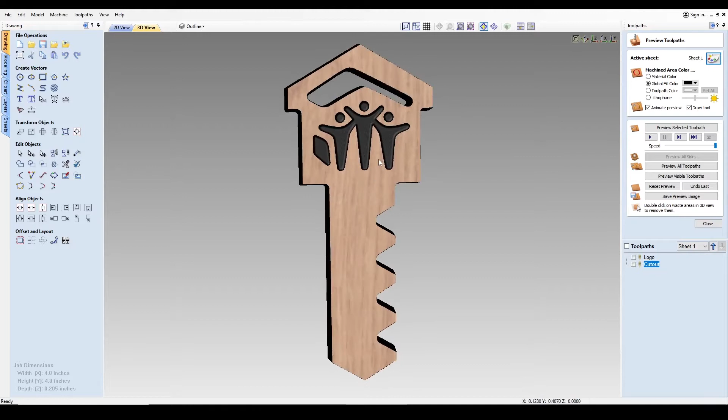The objective of this video clip is to show the creation of this Habitat key that you see here in this rendering. I'll be showing really only the steps necessary to form the key, not going into much other description about the various different features of this VCarve desktop software. I will show all the steps to create the outline and also show the importation of the vectors for this logo, since that part of the artwork already exists.

Now let's see what it would take to create a key from scratch. I'll park a rendering of that key that we're trying to make down in the lower left corner, but we'll use our Vectric VCarve desktop software and show all the tools necessary to make that key from scratch.

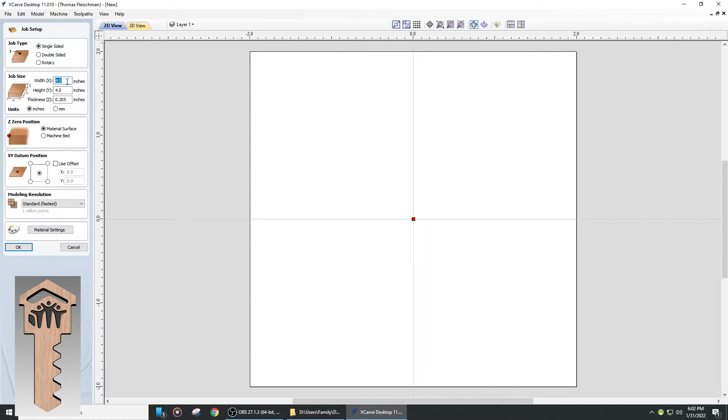So we'll create a new file. It'll be 4 inches by 4 inches by 0.205 inches thick. Say OK. That brings up a palette for us to work in here.

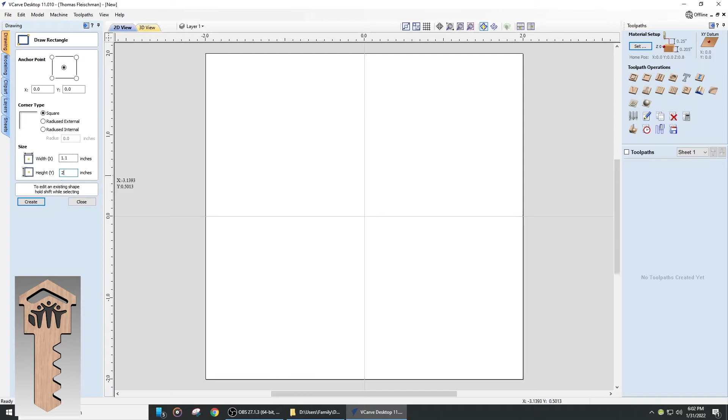First thing we'll do is draw a rectangle, which will be the outer periphery of the key. That key is going to be 1.1 inches wide and 2.5 inches tall.

Create that. Now we want to put the angles on the top and bottom, so we'll close our rectangle tool and go to our simple line tool. Start at the midpoint at the top, drag down, and you can see the angle changing, and it'll snap to even intervals like 30 degrees. If we move off of it and hit spacebar, it'll stop the line.

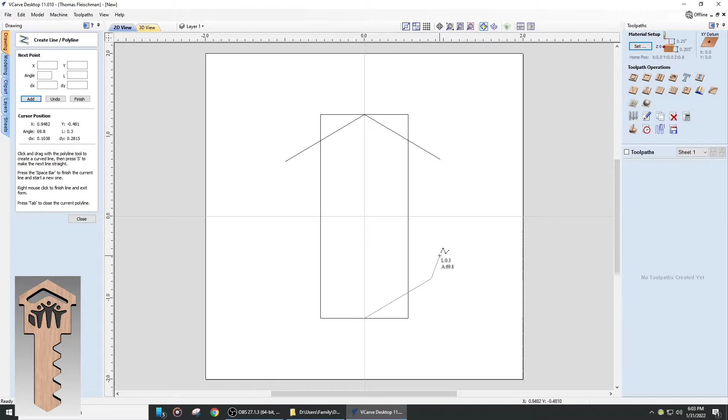We'll create another one: click on the midpoint, drag down, go to 30 degrees, click, hit spacebar. Do the same thing on the bottom: midpoint on the bottom, drag out to 30 degrees, click, move off, spacebar. Click on the middle, go to 30 degrees, click, move off, spacebar.

Now we're going to close our line tool and pick our interactive trim tool just to do some cleanup here. We'll remove these pieces on the end that we don't need anymore. So let's get rid of those. Now we have something a little bit closer to the outer boundary that we're looking for.

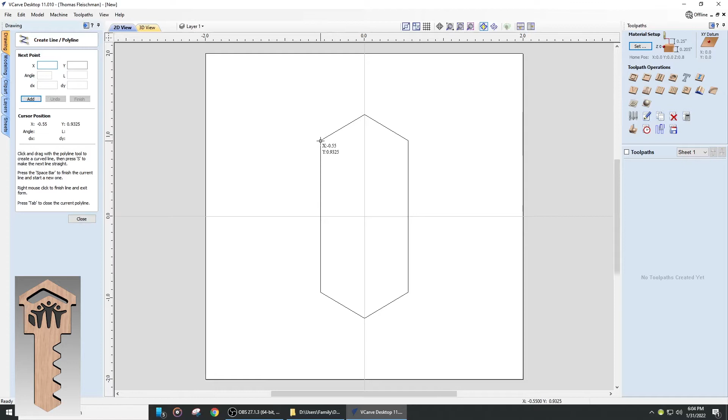Next, I'm going to create just a construction line, and you'll see what this is for in a second. So I'm going to click on this point here, drag out to the left, click off of it, and that's a height that I'm going to want to use here a little bit later.

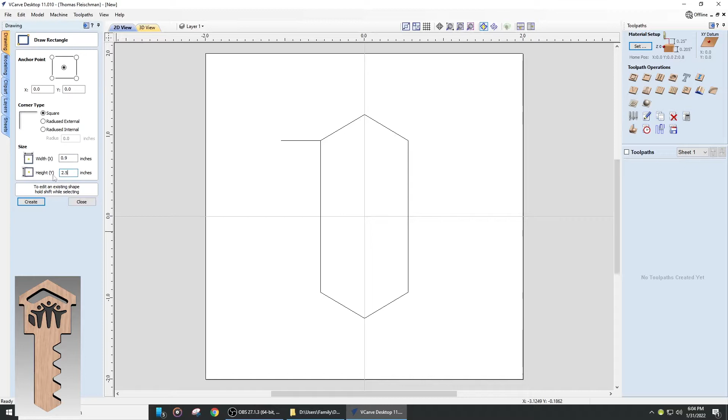So next, let's form the house-looking portion of the key, another rectangle, and its width is going to be 0.9, and the height, not sure yet, maybe 2.5 is not bad. We'll trim it as we need. So let's create that.

Yes, okay, that's taller than I wanted. Actually, I want this to be 0.55 tall. So close that, get rid of that one that I made by mistake.

Now I want this house portion to be up underneath of the roof. So by clicking on this rectangle and then holding the shift key and clicking on this line, I'm going to align the top of this rectangle to this line by choosing one of these alignment tools. And there it is. I still, however, want to create a bit of an eave to go on this house.

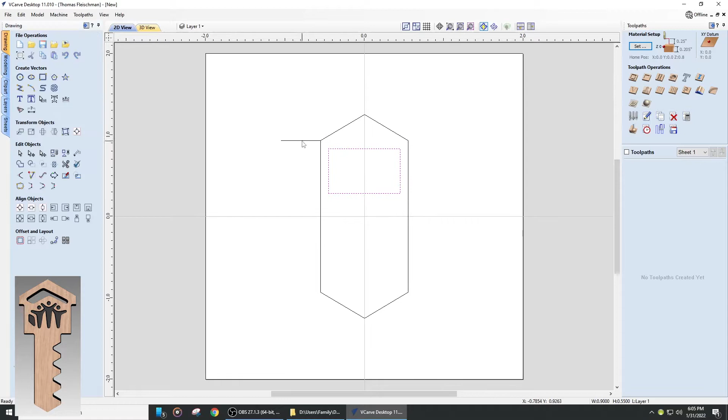So I'm going to move this rectangle down just a bit. I'll click on it, use the move tool, move object relative, in the Y direction minus 0.1 inches. Apply that and close it. I don't need this line anymore, so I'll delete it.

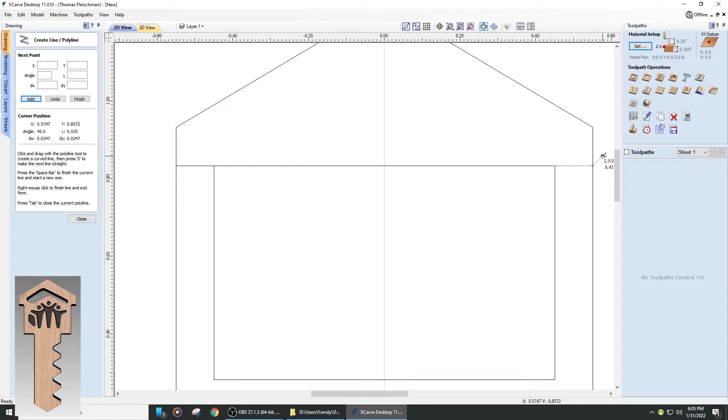I do want to extend this line over to the outside, so let's zoom in a bit there. We'll go to our line tool, click here, go to the outside, release, hit spacebar. Do the same on the other side: go to the outside, release, spacebar, close.

So I got a couple of extra pieces here that I don't need, like this top line. So go to my trim tool and trim that piece off. Actually, don't need—well, that'll delete too much. Let's not do that yet.

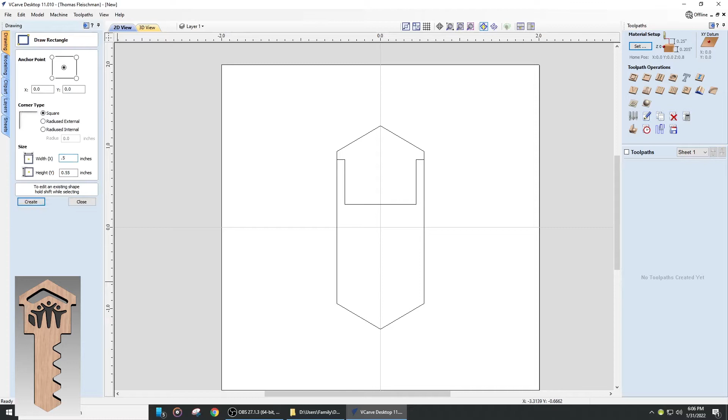Now the long key part that has the teeth in it will be another rectangle. Let's open up the rectangle tool. That one is going to be 0.5 inches wide, and the length I'm going to be trimming later. Let's make it 2.5 for now.

So create that. It has some extra pieces I don't want, so we'll go to the trim tool and trim this off. Now I believe I can trim these outside pieces off. There we go, and this piece here.

So now I have the outer boundary of the key that I want. I just need to put the teeth in on one side. So I'm going to zoom into this area down here, and I'm going to use this line as the base, or the bottom root, for the teeth.

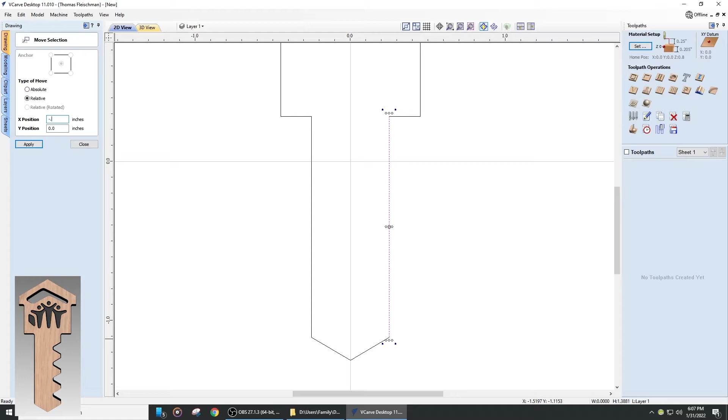In order to do that, when I click on it, I can see that it's connected to all the other lines as a vector. So I'm going to go in, hit the letter N for node editing, and cut this vector here by right-clicking, cut vector, right-click, cut vector, then hit N again to get out of node editing mode. I'll click on that vector, go back to the move tool, relative in the X direction, minus 0.15 inches. Apply, close.

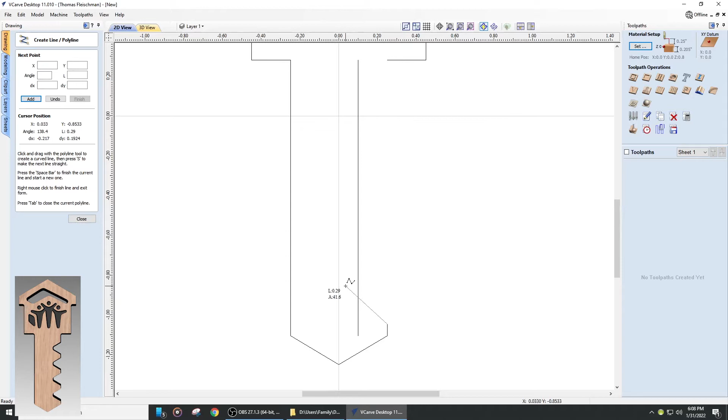Okay, so this is where I want the teeth to end up. So first I want to put a flat on the last tooth here. I'll go to the line tool, click on this point, come up until it reaches 0.06 inches, release, move off, hit the space bar. Then, still in the line tool, I'll click on this point, come over 30 degrees, move around 30, click off, space bar.

Okay, close that. This line I don't need anymore, I'm going to delete that. And I'm going to take advantage of some symmetry, making a tooth out of these two lines that I've already drawn. So I'll click on both of these lines and tell the software to connect them, so now I have one vector out of these two lines.

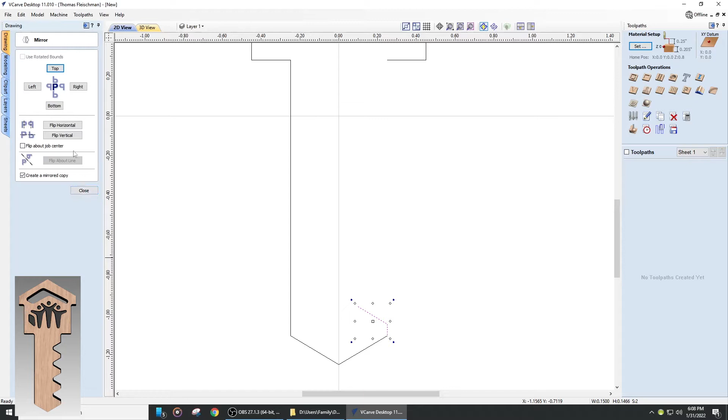Next, I'm going to take those two lines and mirror them with this mirror tool. I will flip horizontally and create a mirrored copy. So let's do that and close.

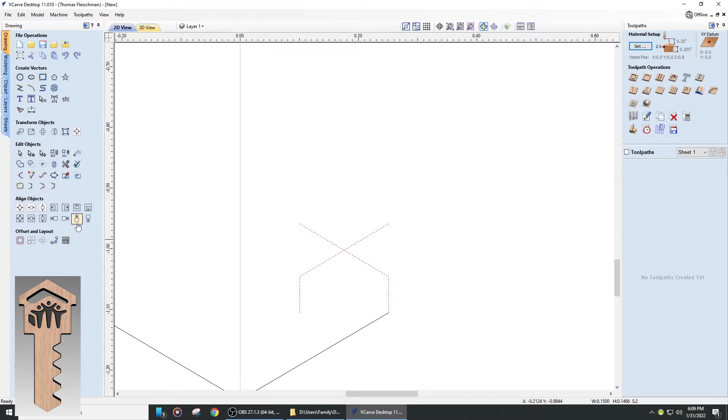You're going to see where this is going. So here's the second line I made, this purple one, and what I want to do is drop it onto the tip of this one. So I've got the first line selected, I'm going to hold the shift key, click on the second line, then use this alignment tool to drop that first line down onto the second one.

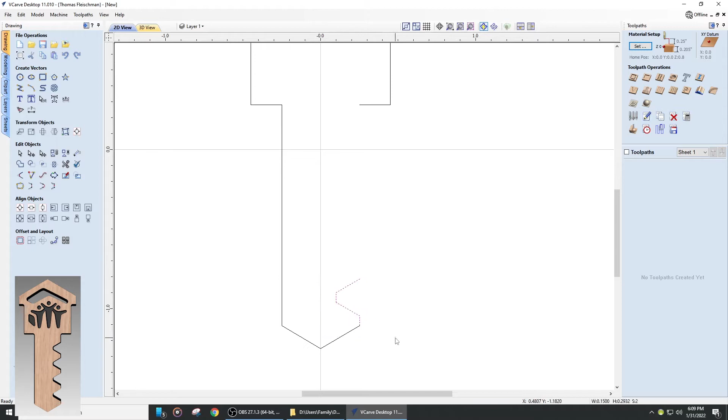So now I've made a full tooth on the end of this key. What I really need though is 4 more of these. Fortunately, I don't need to draw them all. I can take this set of vectors and use the array copy tool - I want 4 rows of keys and 1 column of keys, with no gap or offset between them. So let's just copy that. That took my 1 tooth and made 4 teeth out of it.

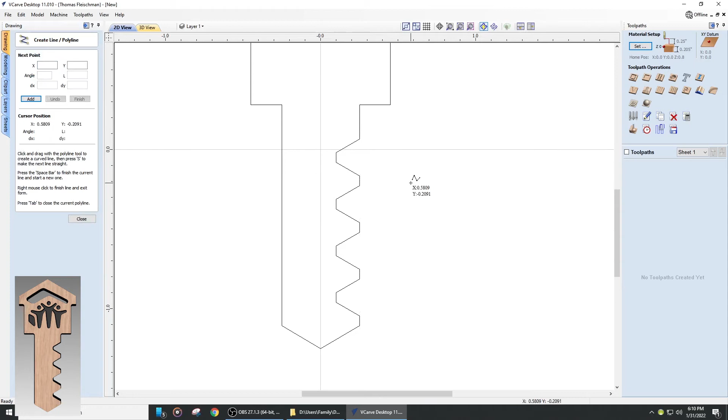Good deal. All right, next, just use our line tool and connect up to close the boundary. So now we've got the entire outline of the key that we wanted. Let's take a look here - I think we might have some open vectors, so I'm going to draw a bounding box around all of it.

Use this tool that says join open vectors. It'll tell me that none are closed right now - I have 10 parts that are open. So I will join those and make one complete vector for the outside boundary of the key.

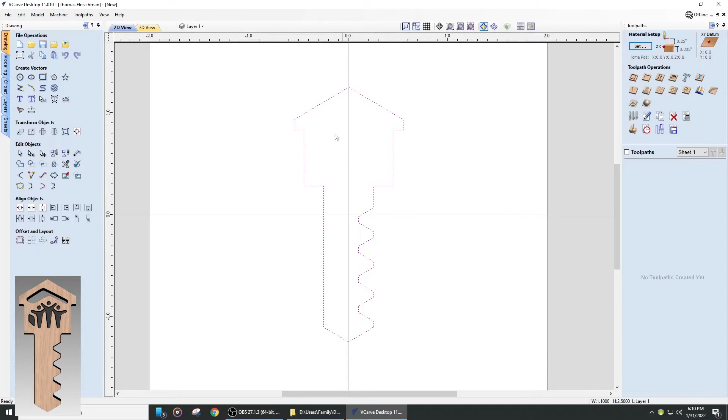Next, we want to bring in the vectors for the logo, the Habitat logo. To do that, I'll say File, Import Vectors, and I have an encapsulated PostScript file here, Habitat key logo. Double click on that one, and in comes the vectors for the logo. Click off of that, and that looks pretty good.

Now we've got our key and our logo, and all that remains is to go over to the Toolpaths and create the toolpaths for the router bits to follow to cut this out of our material.

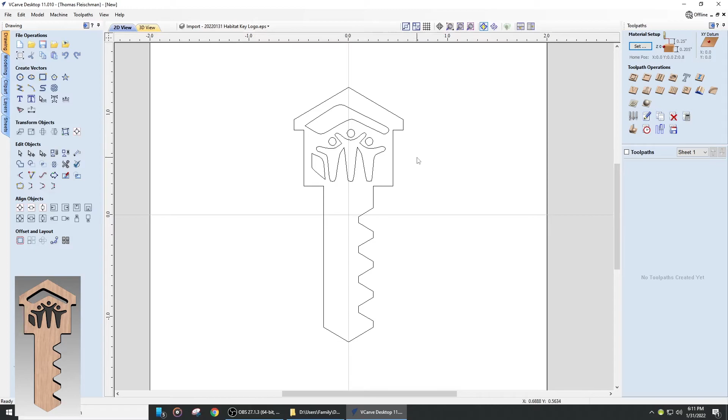What we're going to do is go over to the panel on the right and begin with our toolpath operations. So the first thing we're going to do is set our material and the movement of the router bit above the material. So let's see what we've got over here.

Since we'd already entered 0.205 for the thickness of our material, which we measured with calipers earlier, that's already set. This XY datum is telling us that we're working from the center of the job. The Z0 is on the surface of the material.

These last sections down here are going to tell us how the router bit is going to move around between passes when it does the job. So rapid Z gaps: this 0.25 inches is how far the router bit is going to fly above the surface of the material as it goes from one cut to another. And then the home position is like the very start and stop position, and it will be at 0,0, center of the material, and 0.8 inches above the material.

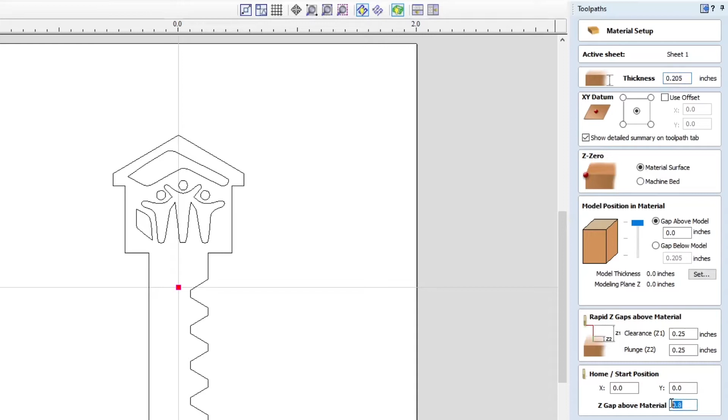Well, let's change it to 1 just to change something here. So okay, so there we go. So that's all set up.

The next thing that we need to do is create this logo as a little pocket inside of the key. So we're going to select that part of the artwork only, and we'll create a pocketed toolpath. So that's this second icon here.

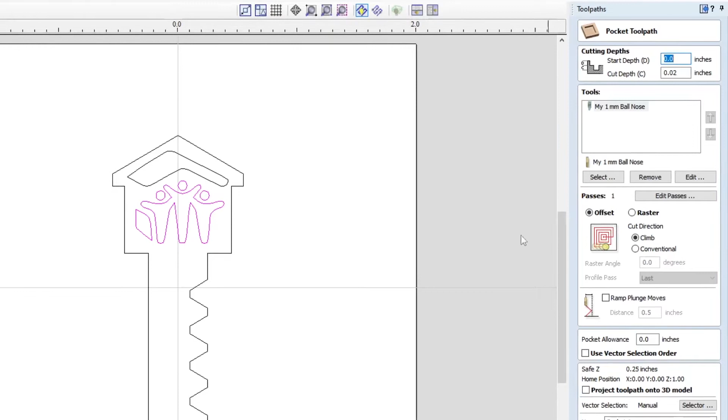Let's pocket. Start depth is 0, we want to start at the surface. We want to go 20 thousandths deep. We're going to use a 1mm ball nose spiral end mill, meaning it has a 1 millimeter rounded radius on the tip of this fairly sharp end mill. That's all good. It's going to offset—move around inside of here in an offset rather than a raster movement. We're going to leave these blank, and let's go ahead and at least name it.

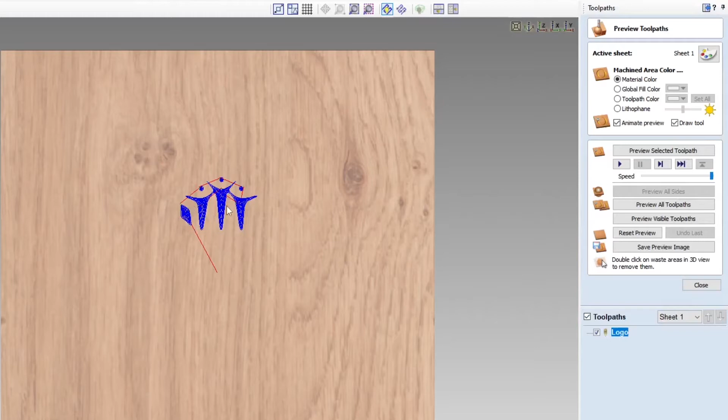So we'll call this logo, L-O-G-O, and calculate. And there it is. So what it's showing me now is the blue here is all of the vectors, or all of the passes that the router bit is going to make to form this pocketed logo. You can see them here—here's the heads, here's the bodies, and so forth.

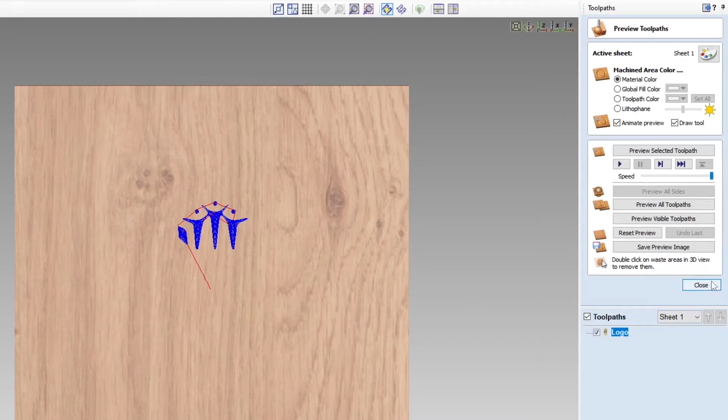So we'll render that here in a second. For now, that looks good, looks like what we want. So let's close that, we'll erase that, and go back to 2D. It automatically went to 3D for us.

So the next thing we want to do is cut out the outer periphery of the key, and we also want to cut this roof out with a hole all the way through, because this is going to be used to hold the key ring. So we're going to kind of double duty this roof object, not only as part of the art, but also functionally to hold the key ring.

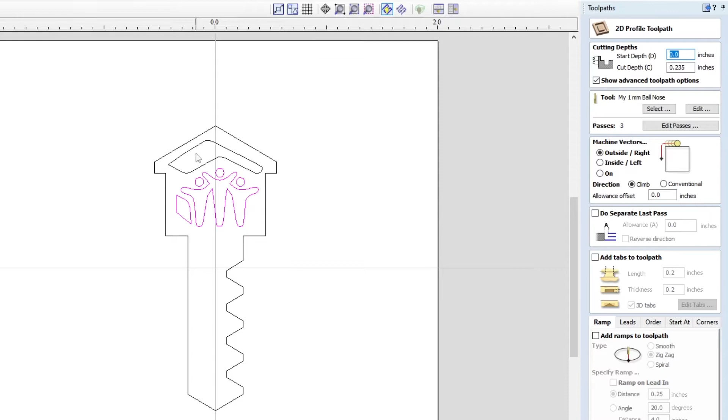So to do that, we'll go to a profile toolpath, and we're going to select the outer boundary and the roof vector. So we're going to go around it.

So the start depth is 0 again on the surface. We're going to cut all the way through the material plus an additional 20 thousandths. So it says 0.235—if you didn't remember the thickness of the material, you can put a Z in here, then plus 0.02 equals 225, excuse me, and that's how deep the router bit is going to go.

Now I'm going to use the 1mm ball nose again. We're going to go outside of the vectors so that we leave this full geometry here. It's telling me it's going to take 3 passes to do that. We'll talk about tabs later. We're not going to do ramps, but let's go ahead and name this one cutout.

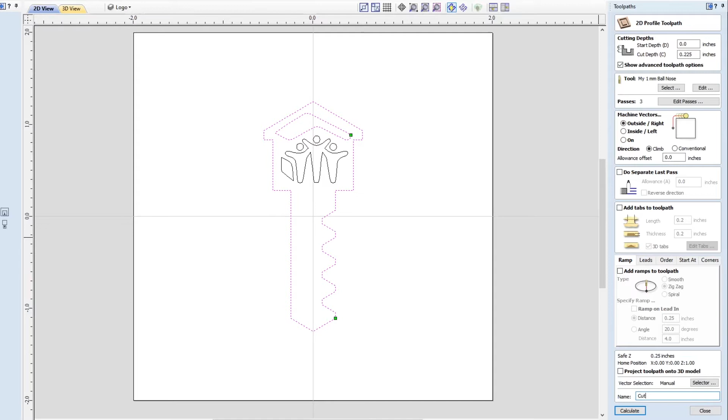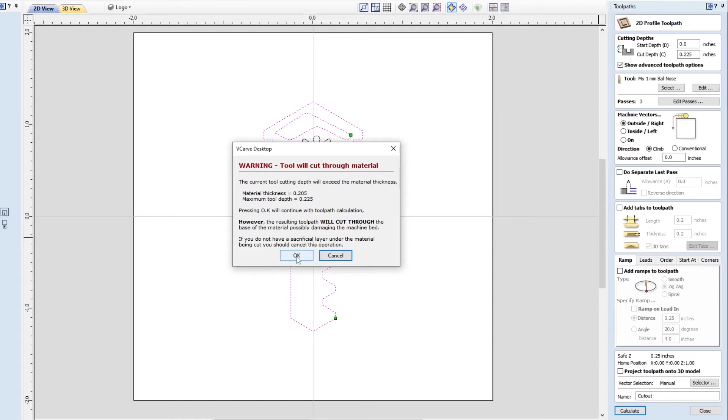Cutout, calculate. Now it gives a warning message: your material is 205, but you've told it to cut to 225. You're going to cut through the material, and if it's sitting on the base of the machine, it's going to cut into the base. So we'll put a spoil board in there so that's not an issue. We say, okay, we understand that's an issue.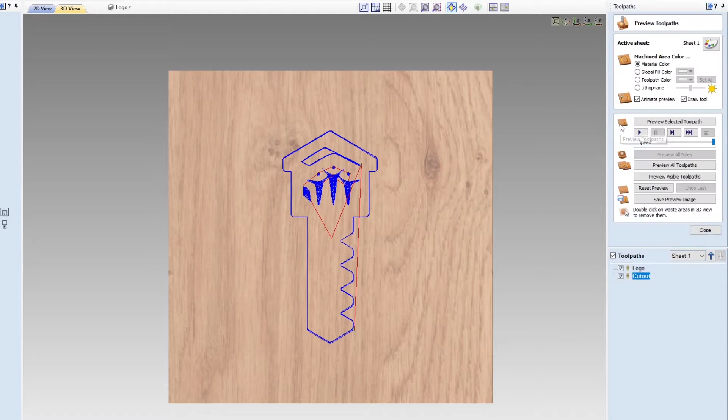Now it's showing all of our vectors. We've got the passes that do the logo, and then the cutout passes. While we're in this 3D view, we can go to Preview Toolpath. This icon is Preview the Toolpaths, and then let's say Preview all Toolpaths.

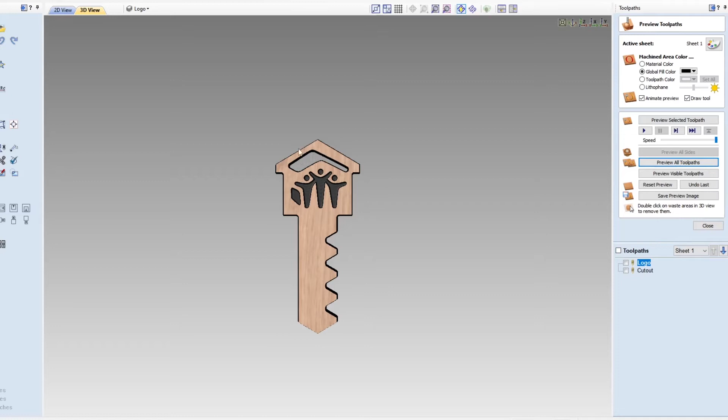It's showing the movement of the router bit, and it's cut into here, and also cut out around that. If I want the logo detail to show up better, I'll change this global fill color to black, and we see the bodies filled in with black. Also, if we double click on areas of the material that are completely cut out, it reveals just the key itself, and all the excess material is moved away.

One other thing I want to show is one of the issues could be - let's go back to 2D view - as we cut this out, we really don't want the key to start rattling around in the pocket that's created there. So one of the things we can do is go back to our cutout toolpath and add some tabs.

So we'll come to this, add tabs to the toolpath, edit them, and put a tab here and a tab here, one on either end, but on areas that are relatively flat, so they're easy to cut off with a chisel and then file down to leave a clean looking product.

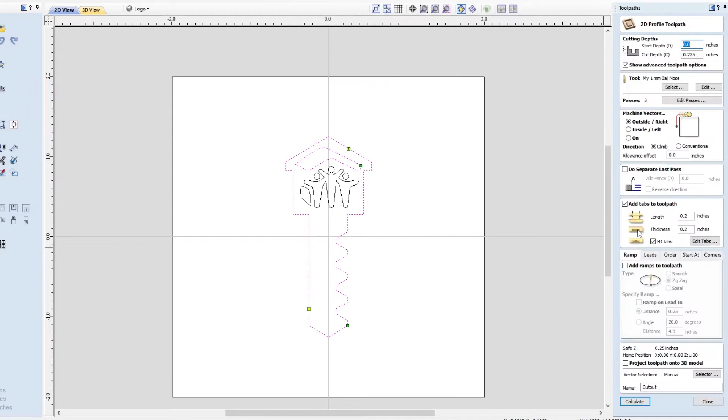Close that, calculate it again. It's going to cut through, that's okay. Let's reset the preview one more time. Preview all toolpaths. And there we go. I'm going to straighten this up just a hair.

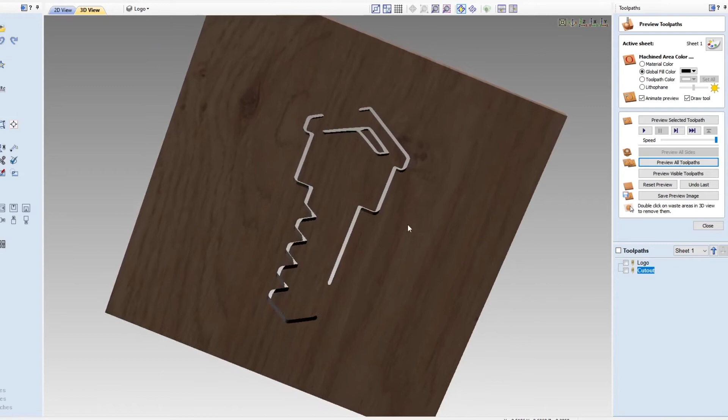Now, what you see is, on the back side, or on the front too if you look, you can see that it's still connected to the outside part of the material. This will keep the key from moving around inside of this pocket when it's completely cut out, and having the possibility of the router bit taking a chunk out of the finished key. So that's useful.

We've created the universal toolpaths at this point, but they need to be converted into a language that the controller for our particular machine will understand. So let's have a look again at the logo toolpaths, the folks in the center there, and then the cutout toolpaths. In order to save these, we'll use the Save Toolpath icon, which will bring up a screen as shown here in the upper right.

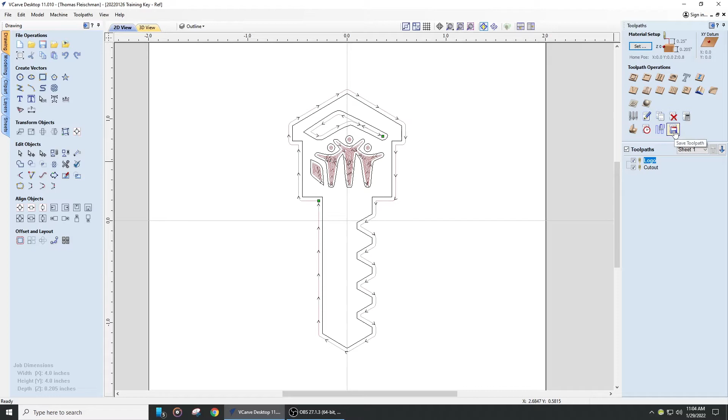We're going to select Visible Toolpaths to one file. What that means is, because we're cutting all of our toolpaths with the same router bit, both the logo and the cutout being cut with the 1mm ball nose bit, they can all be put into one file and be executed successively at the machine.

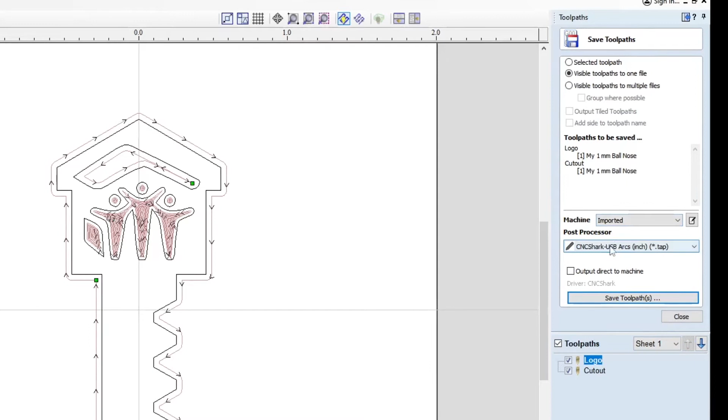It's important that we pick the correct post-processor. Again, these toolpaths need to be understood by our controller, so the CNC Shark USB ARCS inch star.tap, that is the post-processor that we want to use for the router on the Shark 2.

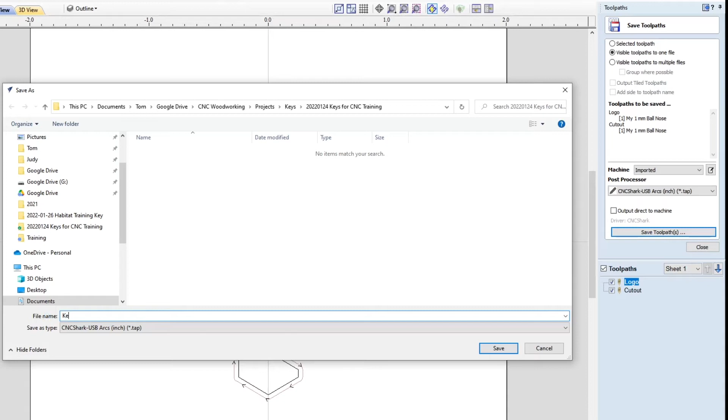We say Save Toolpath, and it will take the name of the first item in our toolpath, but let's make it descriptive of both. So let's just say key for training, and it'll give it the extension .tap, and we say save, and we're good to go. Clear those toolpaths, clear the screen, and we'll also copy that file over to a flash drive and then proceed to the actual CNC machine.

You can see we're now at the CNC machine. We've brought our toolpaths down on this flash drive, which we can insert into the left side of the pendant, which is connected to the control box. We'll go ahead and turn that control box on now.

When we do that, the pendant lights up and gives us a welcome screen. We'll say continue, and then acknowledge the warning that we're using a power tool. We brought along this drawing that gives us some dimensions and other information about the job we're going to run, and a picture of the key.

It helps us know where we're going to put our clamps, and just to verify which router bit we're using, and also which file we're going to be executing in this next phase.

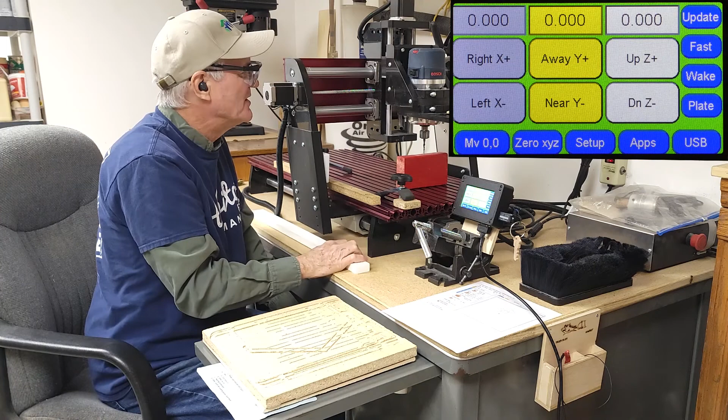So on the pendant here, we have 6 buttons that control the jog movement of the router bit in the x-axis, which is across the machine this way, the y-axis, which runs forward and back this way, and the z-axis, which runs vertically. So the first thing we'll do is lift that router bit off of this safety block by hitting the up Z button.

Pull that block out, set it aside. The next thing is to put in a spoil board, since we know that we'll be cutting all the way through our job, and we don't want to run into the base of the material. So first put a spoil board, a protection board in there, and then the board we're going to run the job on, our good piece of material. Set that on top of the spoil board.

I've also got this spacer that I'm going to put up against this rail here on the left side. The way I've set this machine up is that this rail runs exactly parallel to the y-axis, but it's also put in such a position that the router bit won't run into it, so I have to space over to actually run a job.

So we'll put that in there, and then we'll clamp down our material in the front and in the back. Try to get at least 2 points clamped down, then we can remove our spacer. I'm actually going to move this clamp over just a little bit to make sure that it's out of the path of the router bit, still maintaining that position.

So we've got our material clamped in there now. There's already one key cut here. I'll be running another one next to it, so I've put a point there where I want my X and Y 0 to be. Just like in this case, we're going to be running multiple keys out of the same piece of material.

In order to establish that 0 for the X and Y axes, we'll move the router bit over until it's just above that point, using these jog keys again. First we'll move left, as if facing the machine from this direction. Left, down, near, a little more left. Now that I'm close to that point, there's a button here that says fast. The movements I was just making are at fast speed. I'll hit it once, it goes to medium. I'll hit it again, it'll go to slow.

Now I can move down without worrying about running into the material. I'll go down slowly, and near. Away just a little bit. Away just a little bit more.

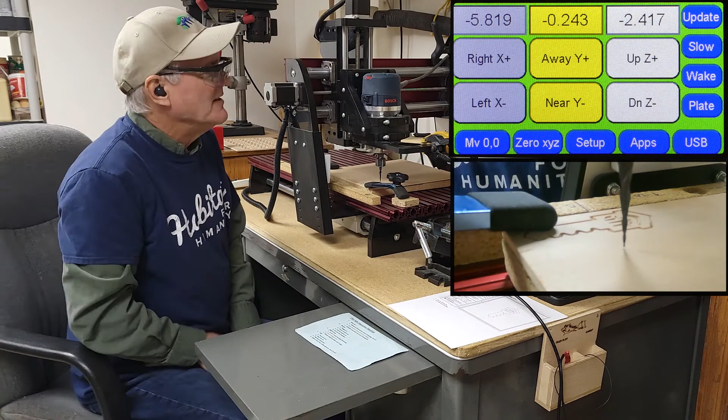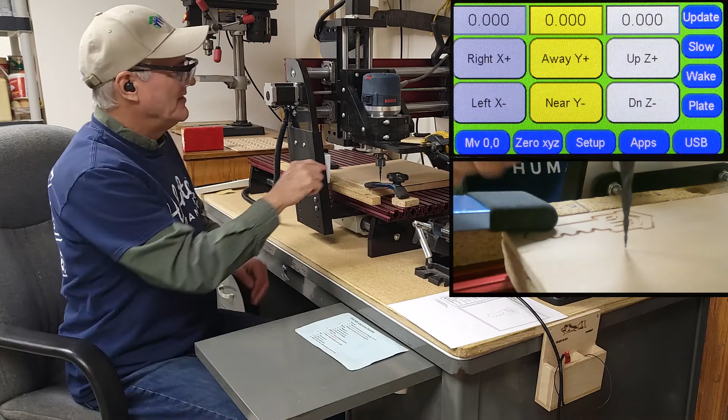Okay, so now there's just these random dimensions relative to where the router bit was when I turned the control box on. But this is the point where I want to set, at least for the X and Y axis, zeros. So I'm going to say 0, X, Y, and Z. It warns me that I'm about to change the 0 point. I say OK. Now that point of the router bit is where X, Y, and Z 0 are established for this job. So X and Y are good.

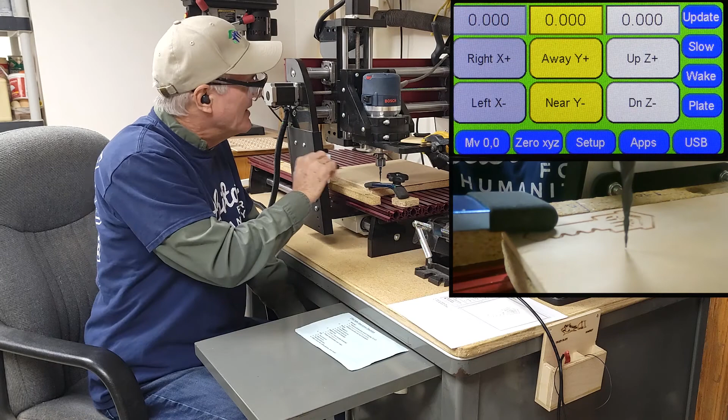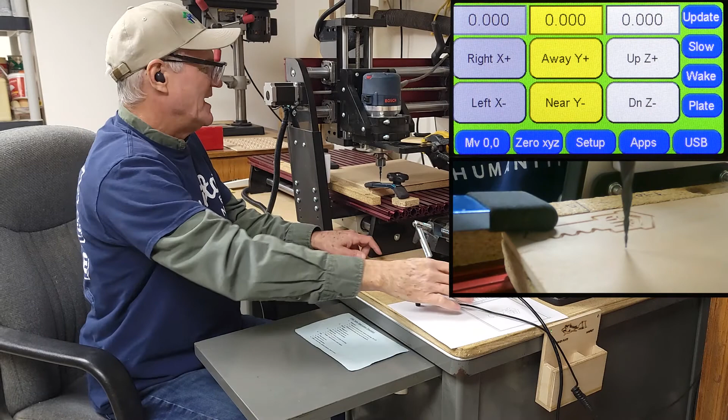I'd like a little bit better knowledge of where the surface is, so there's a touch plate that's available for this particular operation. We'll get that out, move the router bit up out of the way a little bit with the jog, up in the Z direction fast, get it about that far above the material. Then we'll place this touch plate underneath of the bit and connect the magnet to the collet area.

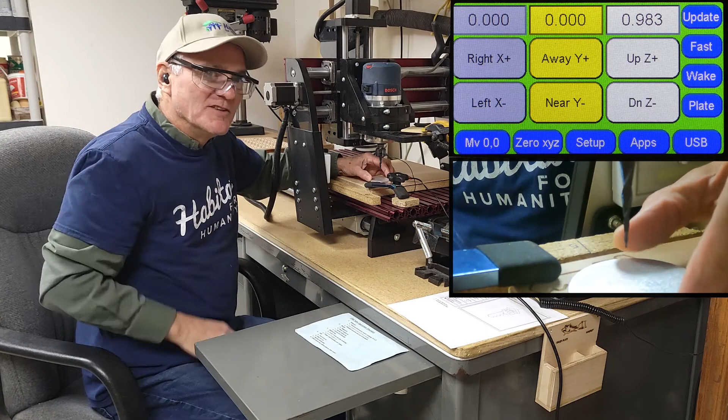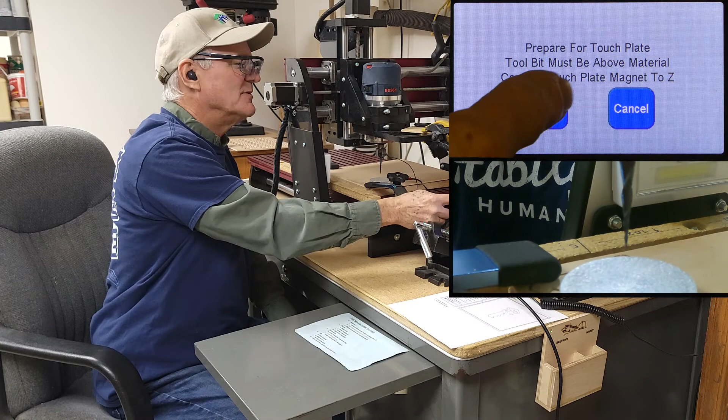What will happen is when the router bit touches the touch plate, it'll complete a circuit, and the machine will know precisely where 0 is because it knows the exact thickness of this plate. So we have that kind of underneath the bit now. We're going to hit the button that says plate. It says prepare for touch plate, tool bit must be above the material, connect the touch plate magnet to Z. We did that here, we say OK. Now it wants to make sure there is indeed a circuit, so it has you touch the bit with the touch plate.

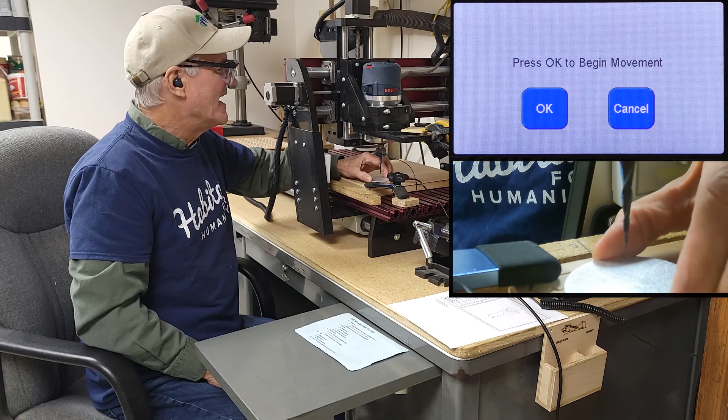It turns red to let you know that we have a circuit. Put it back underneath the bit, press OK to begin. Now it's going to move slowly down. Make sure you don't have your fingers in there, and as soon as it touches the plate, it'll establish that distance and retract a certain distance.

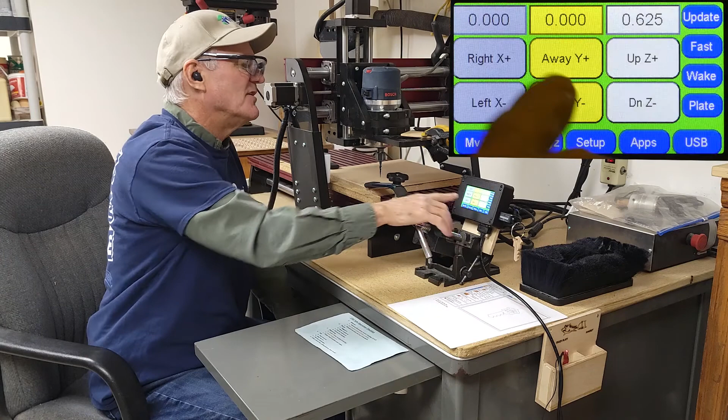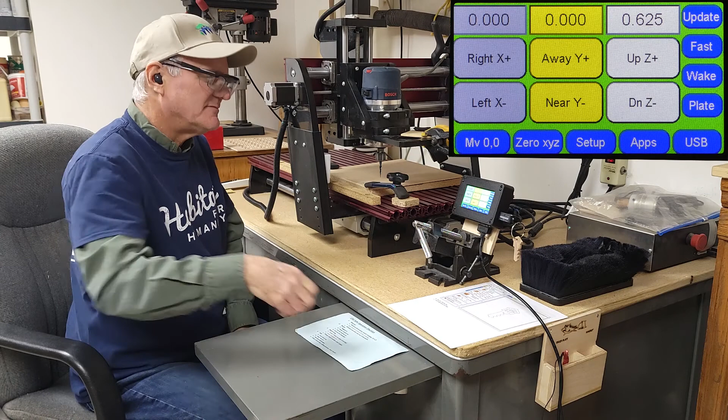You can remove the touch plate, and now we've zeroed in the Z direction as well as the X and Y. Accept these results, OK. So right now the tip of the bit is sitting at X0, Y0, and 5/8 of an inch above our workpiece. That's all good, so we've done the zeroing.

I'll go now to the checklist, and even though we've done all the steps, I'd like to go through and make sure, just to double check that everything is safe before we begin.

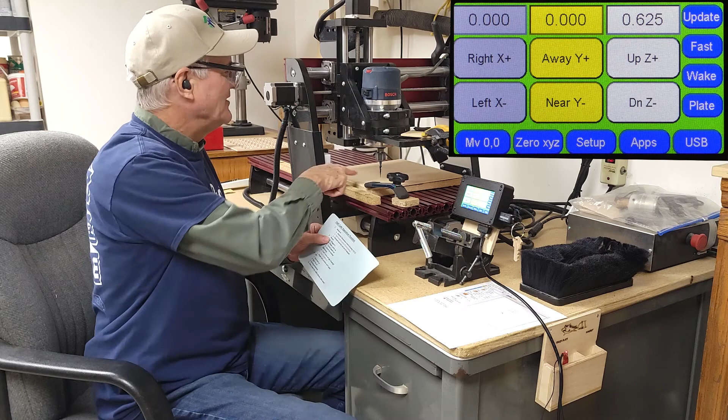Material dimensions match our drawing. That's good in terms of where I've established the zero position. The spoil board is in place for when we cut through the material. We are clamped securely and out of the tool path.

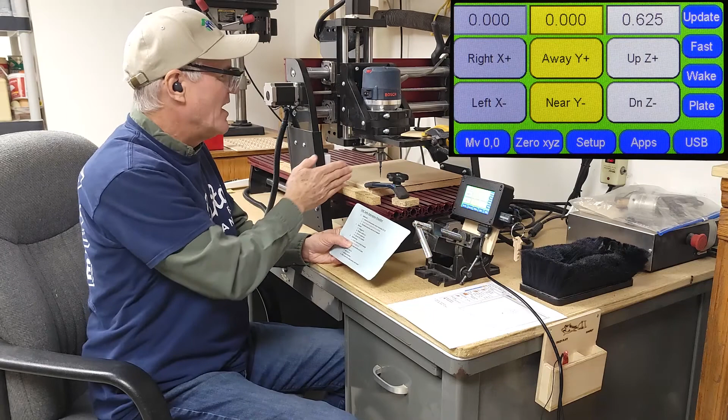The router is plugged in, and we're going to flip the switch on the router to make sure it's turned on. I have the speed I want set on the router, and I have the bit in the router that I want. As far as referencing, X and Y I've established over top of that pencil dot, and I've set the zero height using that touch plate.

Proper start position and Z gaps, so those are within the file itself. In order to look at those, I will hit the USB button. This will bring up a listing of all the files on that USB. There's only one, the key for training file that we created earlier.

I'll tap that, and then it shows me information about that file: when it was created, it verifies the material dimensions, where the origin is, where the home position is, what the safe gaps are above the material when it goes from one cut to another. I can go down the screen and see that it's going to cut both the logo and the cutout, and it's going to use a 1mm ball nose. That's all good, so we'll say next.

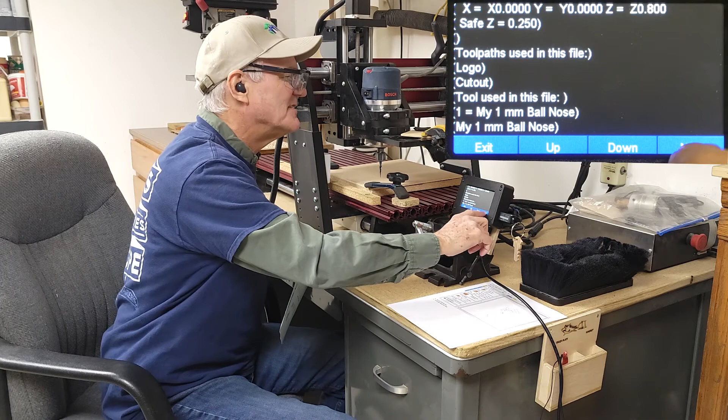This is a screen for another utility called Virtual Zero, but we've already done the zeroing using the touch plate, so we don't need to do this. I'll say do not use Virtual Zero. At this point, we're ready to go.

As far as the rest of the checklist, dust boot is on — that is this. I won't be using it so you can see better how it's going to be cut; we're not going to create a whole lot of dust out of this operation anyway. The shop vac does not need to be on, a dust collection system. Hearing protection, I have my noise canceling earbuds in, and room fan — I have my safety glasses on. So we're good to go on the checklist.

So what it's going to do: it's going to go in and first do a pass to cut out the logo, the Habitat logo. When it's done with that operation, it'll then cut out the key all the way around. It's going to get kind of noisy, so I'm not going to be doing any talking during that point. So here we go.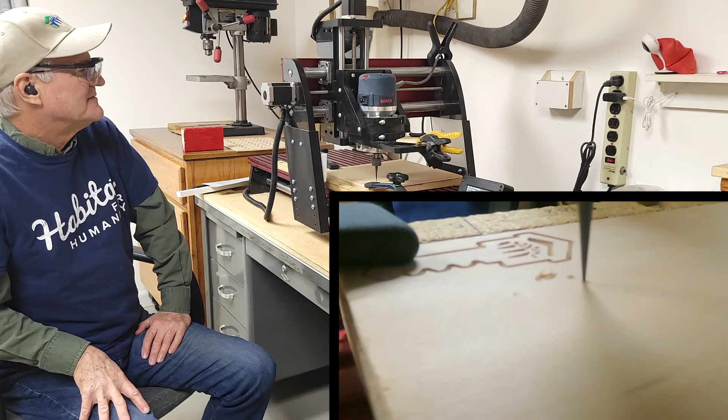The CNC machining operation begins with pocketing out the people part of the Habitat logo. I've sped this up a bit because it takes a little while. After it finishes the people part, it moves on to the roof. The roof is actually a cutout operation because we're going to use this roof and the little opening it has there in order to hold the key ring. So it's going to take 3 passes to get around that roof.

Next, it moves on to the outer profile of the key. This is also going to take 3 passes, but I removed one of them in the middle, so we're only going to see 2 of those passes for the cutout operation. As it goes around, when it comes to this next corner, you'll see it lift up and go over to create one of those tabs. Now it's on the 3rd pass, making its way around the profile to finish the cutout operation for the key.

At the end of the operation, the router spins down and turns off, and I also like to turn it off here at the switch just to be safe. Then on the pendant, we hit stop, and X to exit.

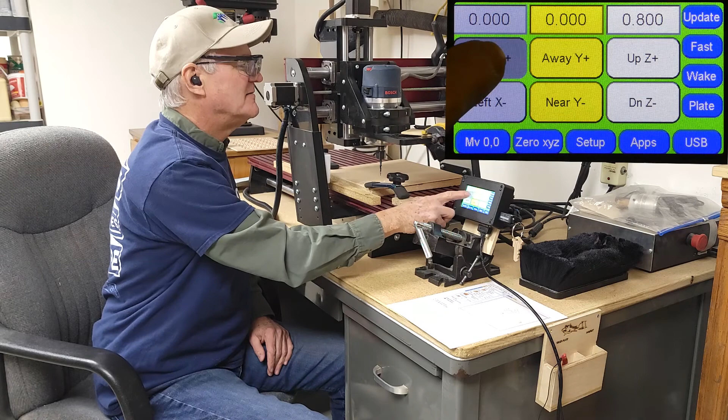Now we're back to the screen with the jog buttons. I can jog it out of the way, let's say over here to the right, and unclamp.

You may remember that we left some tabs in there so the material did not work itself loose. We'll go over and eventually cut those tabs out with a chisel, and do some cleanup with a little wire brush to clean out the logo, then maybe sand it down a bit to be done. It'll release the key, and we could do a whole board full of these if we wish, but here we've made one of the keys and shown all the steps through this operation.

In the video up to this point, I've tried to show all the steps necessary to complete one specific project, a habitat key. I mentioned at the beginning that this video is part of training for some co-workers at Habitat for Humanity, and that training is going to include some still slides like the one you see here.

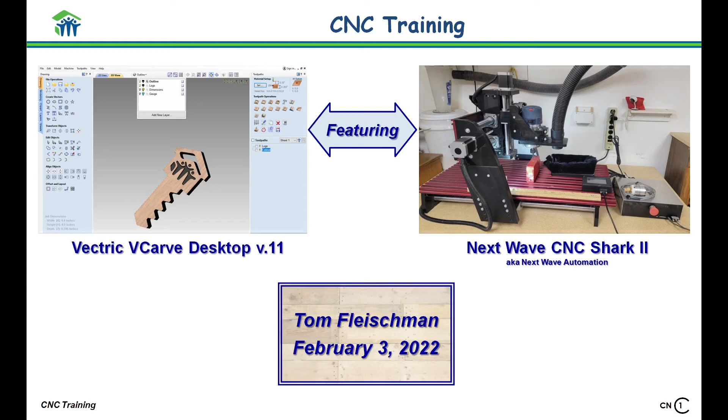I'm just going to step through these in case any of these are useful as reference material. Here we're pointing out that we're featuring the VCarve Desktop version 11 software for the drawing, and also the Next Wave CNC Shark 2 for the actual machining. The next slide shows some example things we've made with the CNC for Habitat.

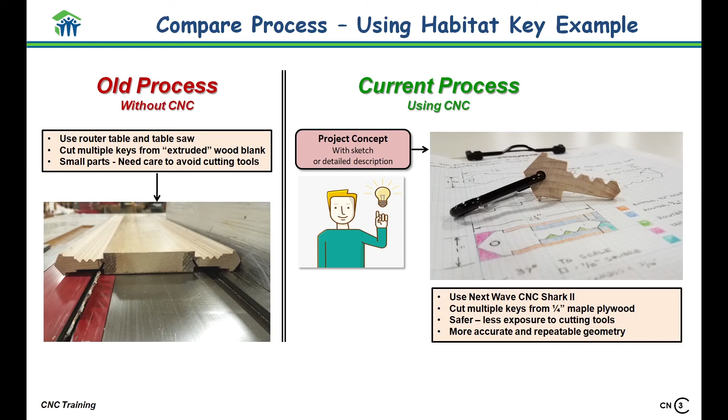We move on to show the old versus the new process, the old process using a table saw and a router versus the CNC machine, then the workflow involved in doing a CNC project.

Here shows an overview of the VCarve Desktop user interface, just the various sections, and then the video you just saw will talk about how the drawing was actually made.

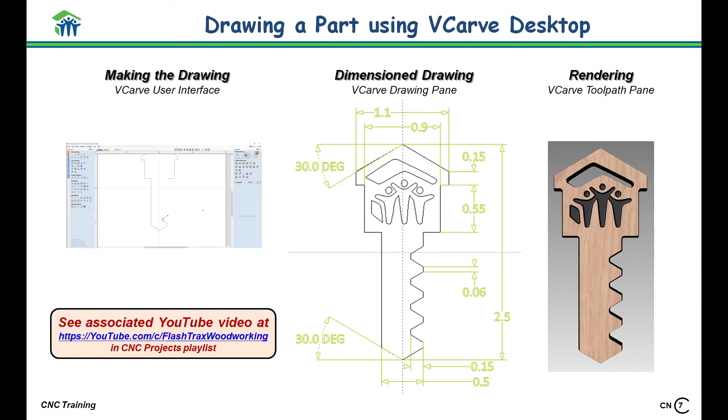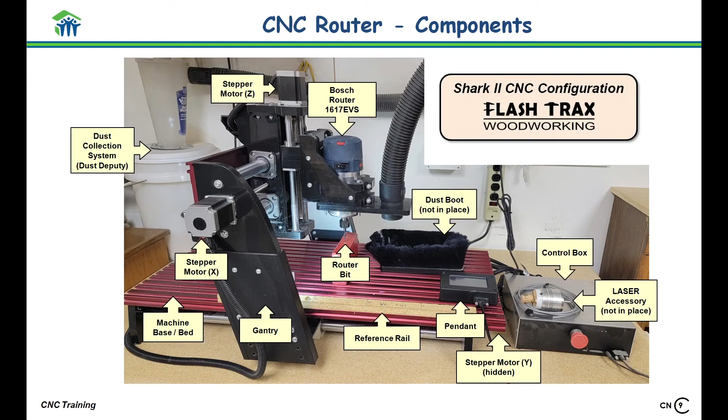Then the transferring of the toolpaths to the CNC flowchart, the router components. Again, you can pause the video at any time to look at these in more detail, and then machining the part, the flowchart for that part of the operation.

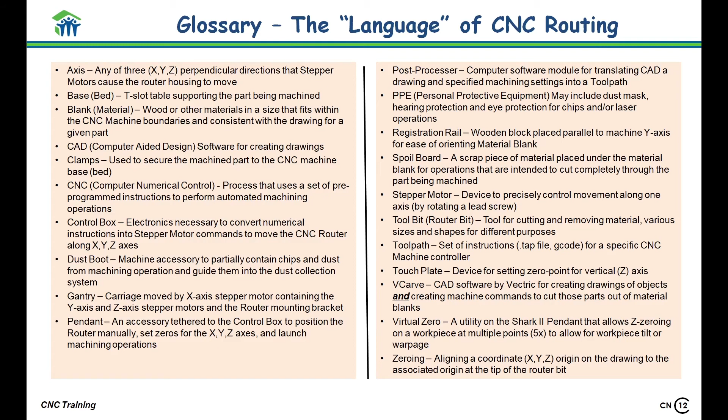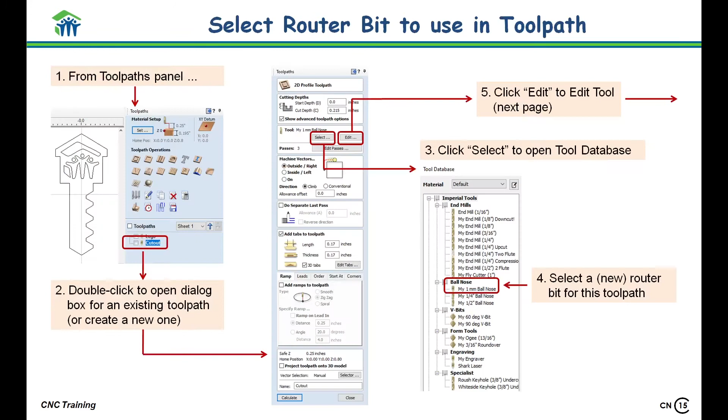And then an appendix with some reference material, a glossary for what I call the language of CNC routing in case some of these terms are unfamiliar, some router bit types shown here, the collection of router bits that we have at Habitat for Humanity and also at Flash Trax Woodworking, then how to select a router bit using the VCarve Desktop software.

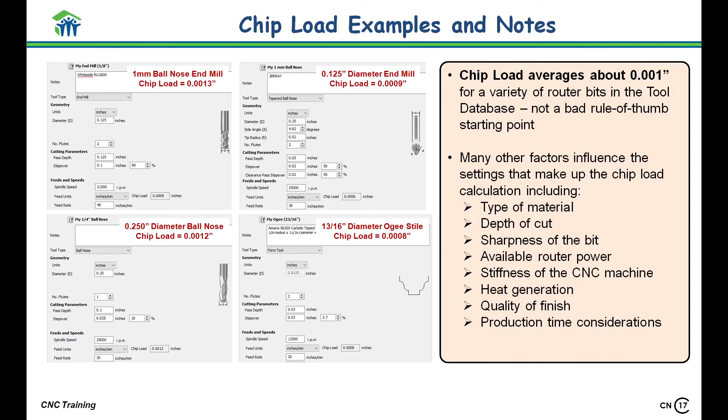A little discussion on feeds, speeds, and chip loads. It shows the equation for the chip load calculation as well as the inputs that go into that calculation. This slide shows that just taking 4 nearly arbitrary tools out of my tool catalog, my average chip load usage is about 1/1000th of an inch. That makes a decent starting point for moving up or down depending on the bit and the application and some of the factors that affect the selection of chip load and feeds and speeds.

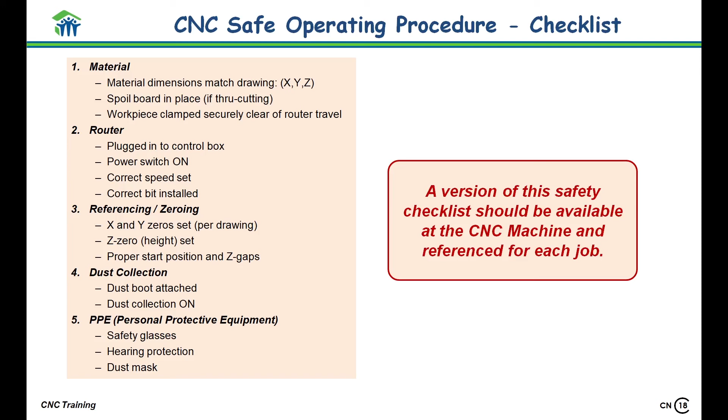A safe operating procedure. I find this handy to keep at the machine itself just to make sure no mistakes are made. And then some additional safety and protocol considerations, and some care and maintenance for the CNC machine.

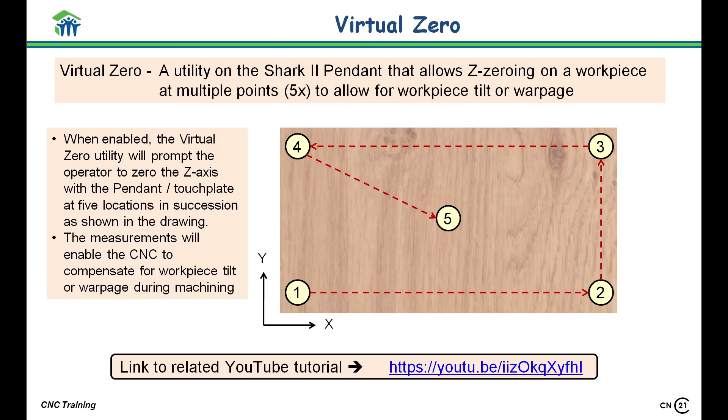A little discussion on what Virtual Zero is, which is a somewhat special feature to the Next Wave automation product. And then a little discussion on vector versus raster and why you want to try to use vectors or import vectors whenever you can to be compatible with this software. Then some reference videos, basically the playlist at Flash Trax Woodworking and some different applications for the software as well as the machine.